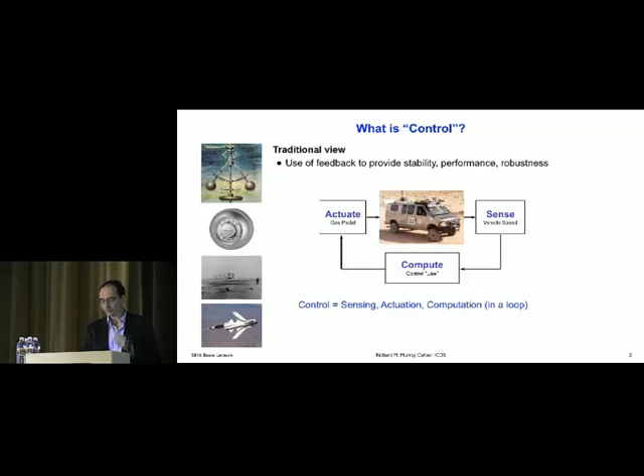But I think that this is changing some, particularly in the last 15 years or so. And the emerging view that I would espouse is that really control is a collection of tools and techniques for analyzing, designing, and implementing complex systems in the presence of uncertainty. And in particular, it's this combination of dynamics, interconnection, communications, computing, and software that make controls work.

And so this notion of dynamics, uncertainty, feed forward, and feedback, just in case you forget, if you're a Simpsons fan, you can remember Duff beer. And so Duff I think should be the official beer of the Control Systems Society. And we'll remember that it's dynamics, uncertainty, feed forward, and feedback.

Now, there are a couple of principles, I think, that go along with that, and these are really unchanged over time. I think that one principle in control systems is that feedback provides us a tool for managing uncertainty, both uncertainty in the system and uncertainty in the environment. Feedback and feed forward also provide us tools for the design of the dynamics of a system by combining sensing, actuation, and computation into the physical, chemical, biological information systems that we build.

And these two properties together give a very important corollary, which is that feedback enables subsystem modularity and interoperability, and that's what allows us to manage complexity at scale. And really, as we go forward, complexity at scale is the big challenge. And the control systems community is going to play a huge role in thinking about how do we design complexity at scale.

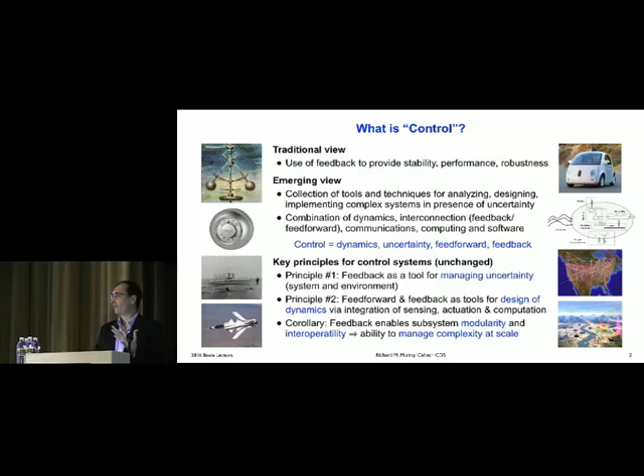And so, blogs didn't exist, Twitter didn't exist, et cetera. And so you posted stuff on the web. And so I created a web page that was the top 10 research problems in nonlinear control, right? Why I thought I was qualified in any sense to write these down, I have no idea, but I did. And this was the time of David Letterman. So those of you who are old enough remember they used to do these top 10 lists, right? You start at number 10 and count down all the way to number 1. So I ordered it that way, and so I put these down.

And in August of 1995, sort of 3 months later, I decided that writing good software had gone from number 3 to number 8. Number 2 was a new one, magnitude and rate saturation. I must have been doing something where all of a sudden I'm going, oh man, this stuff's really getting in my way, right? And then the other one was convince industry to invest. So clearly I'd had a bunch of grants turned down, right? And I was needing money. And so the number one problem in nonlinear control at the time was me getting money so that I could actually do the work in nonlinear control.

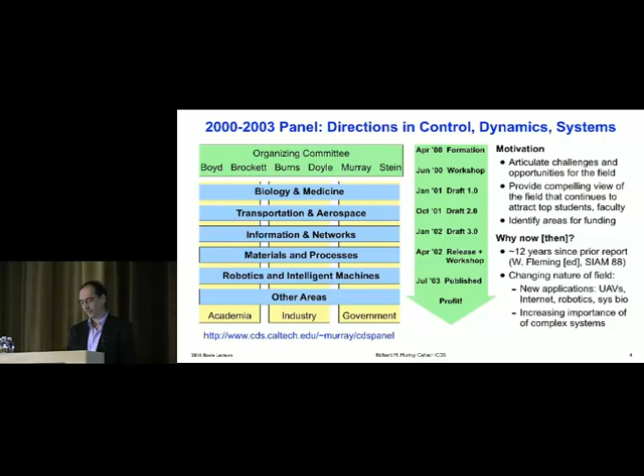And what's in the report, we organized it into an executive summary that tried in a few pages to sort of describe why this was exciting. And then a next chapter that was a little bit longer that gave an overview of the field, what is control, along the lines of what I just talked about, the increasing importance of information-based systems, a summary of the opportunities and challenges. And then in each of these application areas, we went through and talked about what is happening in this area, why is this important, talked a little bit about education and outreach, and then made some recommendations and tried to justify those recommendations. So that was what we put into the report.

And there were 5 primary recommendations at a high level that came out of this. And those 5 were, first, to increase the integration of control, computer science, communications, and networking. Second, to increase the research at higher levels of decision-making, moving towards enterprise-level systems. Third, to explore high-risk, long-range applications of control, and we listed a bunch of areas that one might consider doing that in. Fourth, to maintain support for theory and interaction with mathematics, because we felt that that was something that had been very important for the field.

And fifth, to invest in new approaches to education and outreach to non-traditional audiences, to really make control something that was used more broadly than just the controls community itself. And so those were the 5 recommendations. And if you sort of look back and say, how'd we do? I think we actually did okay on most of these.

So certainly if you look in the first area, there are now things like the technical community on network systems within IFAC, the cyber physical systems program at NSF, the Transactions on Control of Network Systems within the Control Systems Society, and many other things that line up, I think, with this first recommendation. In the areas of control at higher levels of abstraction, there's a lot of work in formal methods and other things that's now becoming more prevalent. Smart grid, smart transportation, smart infrastructure systems. And in fact, within the Control Systems Society, we now have a couple of technical committees on smart stuff.

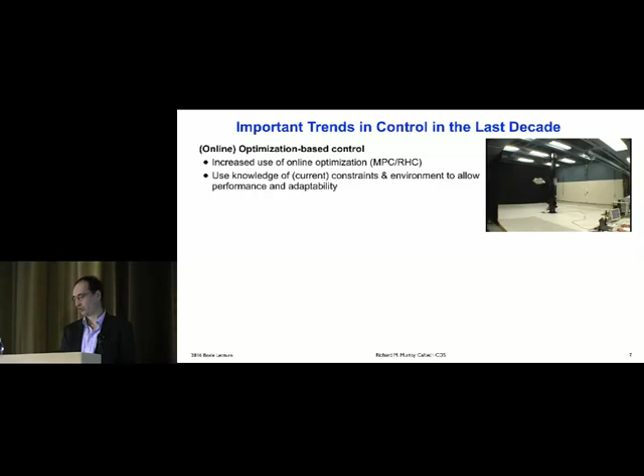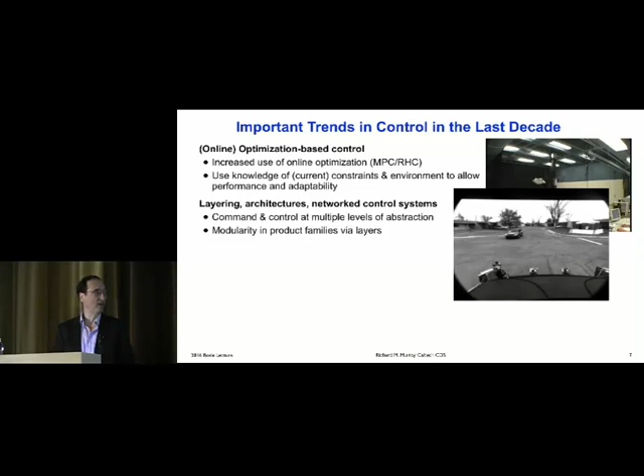Another is thinking a little bit more deeply about the role of layering architectures and networked control systems. This is a video from the DARPA Grand Challenge showing one way in which we can think about this layering, so the decision making that's happening as we're driving and we're having to think about low-level things, how do we stay centered on the road, how do we drive at the right speed, higher-level things, what road should I go on, should I turn left or right, higher-level things, when I come up to an intersection, what is the interaction with the vehicles at that intersection?

So as I come up to an intersection and I see a car stopped, I need to know that that car is stopped, I need to stop behind it, I need to wait until it goes, once it goes, I need to drive up to the intersection, right? And of course, this is the precursor for many of the things that we see in self-driving cars. This was a project that was done by a bunch of Caltech undergraduates, right, using some of the advances from our field. So I think that this is an important area as well that we've made great strides in.

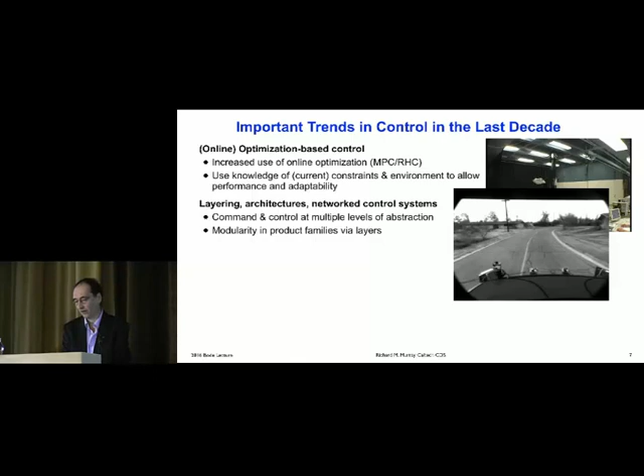As I've already mentioned, I think one of the properties of control is that it allows this modularity that allows us to connect stuff up together very quickly and get very complex systems working together. Another area where we've seen a lot, and I'll say a little bit more about it in a minute, is in the use of formal methods and combining ideas from computer science. This is a graphic of something we call the RoboFlag drill. It came from discussions with Raf D'Andrea, who was at Cornell at the time.

And this was a distributed protocol for trying to block a bunch of incoming attackers. So we were thinking about this as you're playing soccer and you've got a bunch of people coming across the field and you want to sort of guard each one of them. How do you do that in a distributed way? What information do you have to share? And it was a nice example of something where we wanted to prove that we could actually satisfy some property. So it was an example of applying these formal methods and thinking about hybrid and discrete systems and kind of the things that we're doing now in cyber-physical systems as a community.

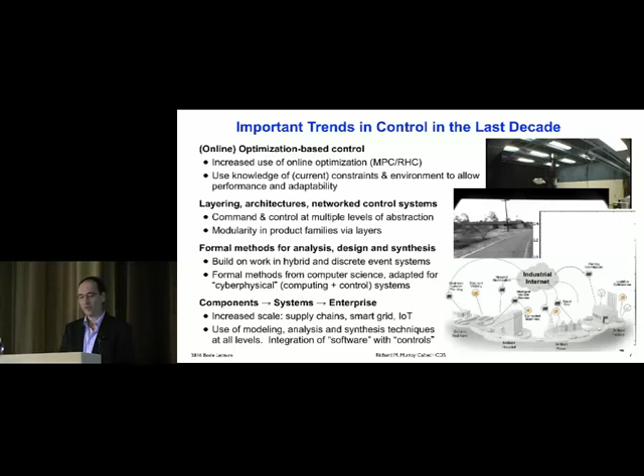And then the last area, I think, in which we started to make a lot of progress, this one's still a little bit more in its infancy, is thinking about moving to these enterprise scale systems. And in particular, as we look at things like the Internet of Things and other things, the industrial internet, this is a GE term, I think that this is an area that we see happening in the world around us and many of us are participating in.

The 5G communication network standards that people are talking about, they're talking about 50 billion devices, right? So how do we do things at the scale of some fraction of 50 billion devices, right, all managing our infrastructure systems and other things? So I think that that's something we're starting to see happening technologically, lots of future things we can do.

Okay, so as we look back, I think that we sort of see what we were looking at, some of the things we missed, but a lot's happened, and I think it's a sort of fantastic area. I want to talk a little bit about a couple of areas, and one of them is to sort of, what do things look like today in the area of networked control systems?

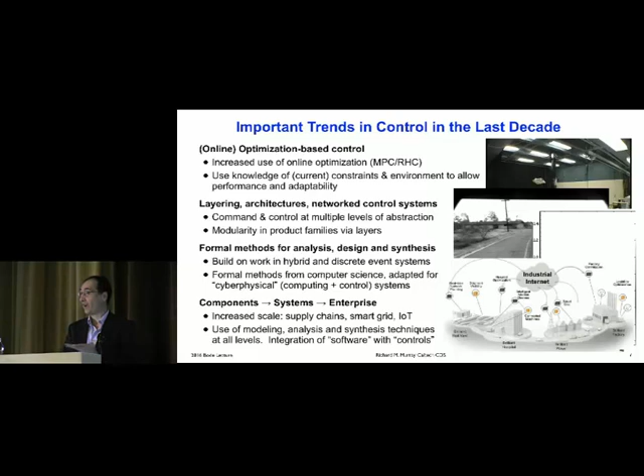And so, I think as we think about what does the design process look like today, as we design these complex systems, it's coming together quite nicely. There's still lots of work to be done, but it's coming together quite nicely. We start with some physical system that we want to control.

And of course, as control engineers, and I think increasingly we're getting involved in this very early in the system design, the first thing we do is we put together a model of the system, a model of the environment that the system is going to see. And we use that model to sort of say, will this physical system satisfy it? Have I sized the actuators right? Can I turn the steering wheel? All of those sorts of things, depending on what the system is.

And if it's not quite right, we use that model to do design iterations, right? So we'll iterate on this design and then get it to where at least we have a nominal system that can satisfy the specifications. And then we'll start to design the feedback loops that go around that, perhaps starting with the inner loops and the lower level things where we're using sensors and simple Kalman filter processing and other things and PID loops and their ilk.

to do things. And again, at this stage, we may find out that the Bode integral formula tells us that, oh, you can't actually get all that you want out of this now that we start looking at the feedback properties and the noise rejection and other things. And so we may do new design iterations. So those design iterations may change sensing and actuation, may change the computational framework, the architecture, and other things. And then we move progressively to higher levels of abstraction.

So we move to an optimization-based layer, where we'll start to do more complicated types of state estimation, maybe moving horizon estimation, particle filters, Bayesian inference types of things. On the control side, if you want, we'll do things that look more optimization-based in terms of model predictive control, receding horizon control, and those sorts of online optimizations. And again, we may do design iterations here as we do this.

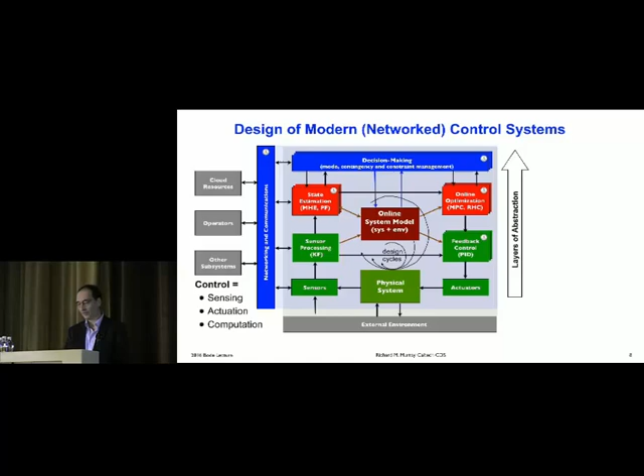But it's also very much control in the sense that I would describe of using dynamics, uncertainty, feedforward, and feedback. And so I think that it's something that we can look for how to do all of that. And this is a problem that's not just, if a computer scientist looks at that, they go, yeah, this is what we do too. They might look more at the higher levels than the lower levels, but we really have to look all across these.

So there are examples of this all over the place. Aerospace systems, self-driving cars, factory automation, process control, smart everything. And so there's certainly lots of places that we see this. And this is the type of architecture, I think, that we see, certainly in the industries that I interact with. Now, there are a lot of challenges, and these are ones, of course, that people are looking at.

One I think that's an interesting one is to think about these layers of abstraction and how do we connect the layers of abstraction. How do we define what those layers of abstraction are and what the interfaces are between them? And how do we define what the contracts are? That is, what do I assume about the lower layer at the higher level, and what do I assume about the higher level at the lower level, so that when I interconnect these two things together, across these layers of abstraction, it works. And we know from the internet and other things that those layers of abstraction and the modularity within those layers, the ability to change the underlying technology, is a huge enabler for moving forward quickly.

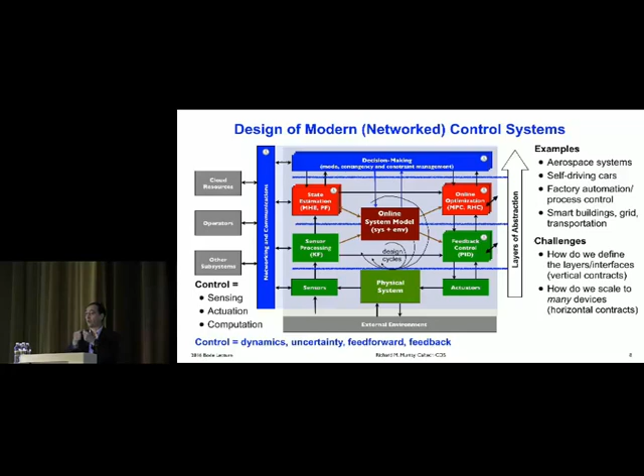I think we also have to think about how we scale these to 50 billion devices or some fraction of that. And so you can think about that as how do we scale in the horizontal direction. And so think about those as horizontal contracts. So as we look at swarms and smart grid and other things where you have a bunch of systems that are at the same layer of abstraction trying to do the same thing but are interconnected, how do we think about, again, the contracts, the horizontal contracts now that might connect that together?

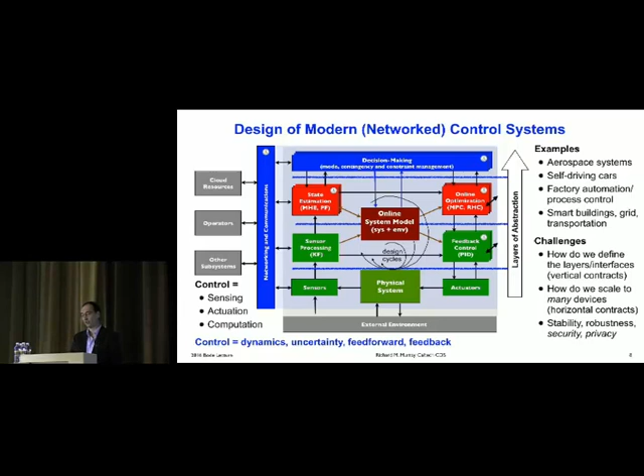And of course, all of this needs to be done thinking about stability, robustness, and importantly, security and privacy as we go through. So this is, I think, what we need to think about and what we're currently doing in terms of control systems. And so I want to talk about a couple of the pieces of this just a little bit to give more insight and say a little about where I think there's some opportunities to do even more. So one is in the area of formal methods and control.

And so Claire Tomlin asked me to give a talk at Berkeley, and she gave me the title of the talk. And so it was rapprochement between formal methods and control. I had to look up what rapprochement meant. But it was quite nice, right? You know, sort of the bringing back together, right? So reapproach of these two areas. And I think that's a very accurate thing. So the discrete event systems community has been thinking about this for a long time, but really there'd been kind of computer science going off and controls going off, right?

And now I think the two are starting to come back together, somewhat enabled by the history of the discrete event community in terms of doing that, but I think building more. You know, on the controls community, we'll think about a block diagram that looks like this, with apologies to John Doyle for drawing the arrows backwards.

And the type of specification that we might do here at a high level might be some sort of an H-infinity style specification, right, where we say that we want some output measures, errors or whatever they are, to be bounded based on the disturbances, and also allow for system uncertainty. So we're going to capture that uncertainty. And so certainly here we see dynamics and interconnection and feedback, if not feed forward explicitly, although as we know in many of these systems there'll also be a feed forward component.

Now, we can redraw that diagram just a little bit as something that might look like this. So now we've got a plant, a controller, some sort of environment, unknown environment maybe, or the delta block up there could represent system dynamics or environmental dynamics and disturbances. But I think an interesting question is to say, well, what happens when our description of all of those is in fact a discrete transition system, not differential equations or transfer functions?

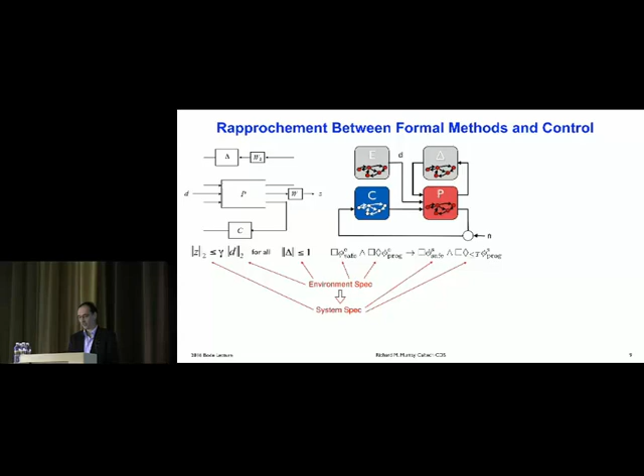And we do this in controls all the time. An LQR controller, I give you x dot equals Ax plus Bu. I give you a cost function that I want you to minimize, and I call the LQR command, right? And so we want to do the same thing now on this other side. And so this is, I think, an exciting area. It is very much, in some sense, at the heart of things like cyber-physical systems.

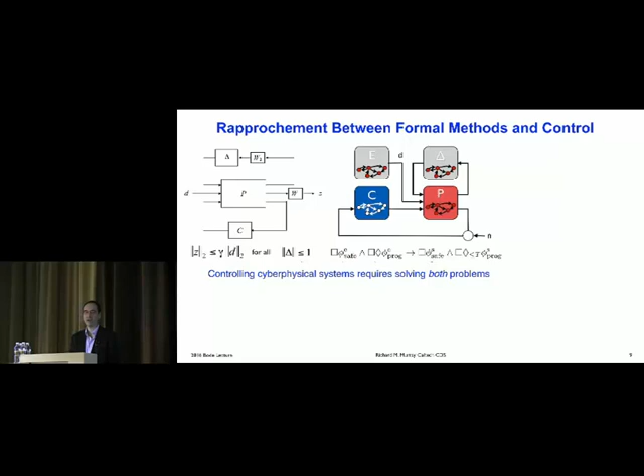And of course, you can't just solve one or the other. Well, you can, but then you will be relegated to your layer and not the layers in between. And so I think we have to figure out how to pull these things together. And there are many examples, from aircraft to self-driving cars to the industrial internet. And broadly speaking, I think that we really are starting to get more serious and more rigorous about the control of these sorts of reactive systems.

The systems are clearly too complex to be tested by trial and error. We must use more formal methods. The controls community is fantastic at using theory to help solve problems.

The systems are much too safety critical to do this, so people probably know that for software, which is what control systems are these days, running in aircraft, you have to certify that your safety critical software, so things that might lead to loss of human life, have to be shown to be reliable, to have no more than one failure in every 10 to the 9th flight hours. 10 to the 9th flight hours is 100,000 years.

How do you show that, right? You don't do it by testing, right? You have to do it by rigorous analysis combined with testing, right? And sort of think about that. The other thing I think that we're starting to see a little bit of is moving from this design then verify, here's the logic, go tell me that it does the right thing, to more of a specify then synthesize. Tell me what you want the system to do, and then I will automatically synthesize the logic.

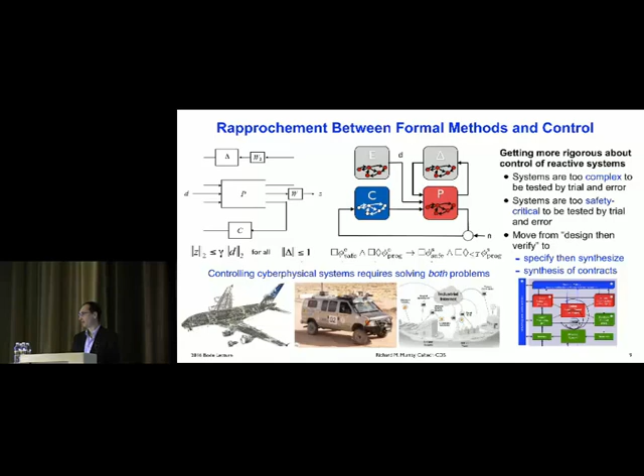And again, the controls community's been doing this for a long time, right? We're starting to see this come up a little bit more in the hybrid systems and computer science communities. I think a next step of that is to think about what are the contracts that we need to use at the different layers of abstraction, so that we can now synthesize the contracts. Here's what that optimization-based controller should do in terms of its specifications, so that when I connect it with a decision-making level and I connect it with a feedback controller, the overall system will behave in the right way. And so I think we need to think about how to do that, and some work is starting to happen.

Another thing that we're starting to see a little bit more is combining both data-driven and formal methods types of systems together with controls and thinking about human-like interactions. And again, self-driving cars is really pushing this forward as we have to think about how do we make sure that humans can operate in environments that machines are operating.

And finally, I'll just point out again, for about the 5th time, that we need to be incorporating security and privacy guarantees as we do this. We don't want to redo what we've done before in SCADA systems and other things. It's not think about that, it'll get handled later. No, it won't. We got to think about it now. And again, these ideas of formal methods and control and other things, there's great connections between observability and reachability and things like privacy and security. And so I think that the tools can come together there.

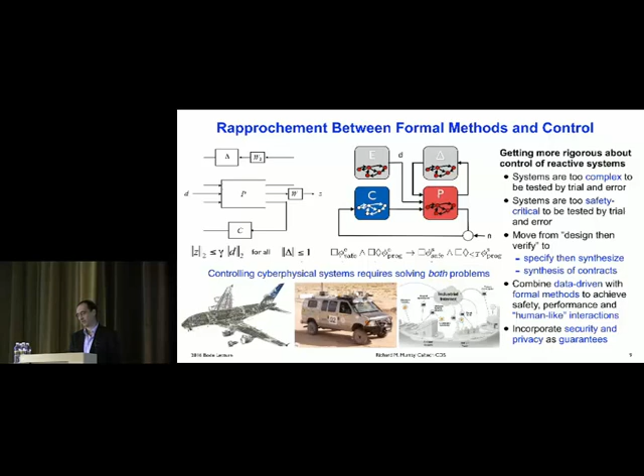Okay, so this is, I think, an area that when I look out now, I see lots of promise and lots of people working on it across the community. We've seen many things here at CDC about this. So where do we go from here? This is sort of what's happening and what's currently here. So I think there are some opportunities for the future, and I've divided them into 2 pieces. One that I'll call traditional, and I don't mean it in a derogatory sense, but thinking about the things that we know that we do well. And so certainly one is what I've just been talking about. I think we need to continue our focus on rigorous design of complex systems.

One of the things that in the last couple of years I finally understood, people have been trying to tell me for a long time, I used to say, oh, cyber-physical, how clever, they renamed hybrid systems, and they got more money for it. That's pretty cool, that's a good idea, right? Because you can't fund hybrid forever. So let's just call it cyber-physical. But in fact, that's not right. Cyber-physical systems are different.

Because they're really bringing a computer science perspective to the control of physical systems. So the cyber there matters. It's not just continuous and discrete. It's thinking about the things that computer scientists think about, verification and model checking and scale and all of the other things that computer science has done so well. And really, that to me was like, oh man, I finally get it. I'm working in this area, and it finally occurs to me why cyber-physical really is something that's kind of new and different.

I think the other thing that we have to think about is large-scale systems. The Internet of Things is coming. It's an opportunity. It's going to have huge numbers of devices on it, and we're going to start connecting those together.

The 5G networks, right? People should remember the 5th G stands for control, right? Because really it's putting in the time criticality and other things. That's one of the goals of the 5G networks, is to get the time criticality down to where you can use it for feedback control systems.

So guess what? We're going to get to use it for feedback control systems, but we're going to have subsystems that consist of thousands and millions of devices that are being connected together. And so how do we think about that, I think, is a good one. And again, data, security, privacy, humans, the things we missed the first time around, let's not miss them this time as we go through.

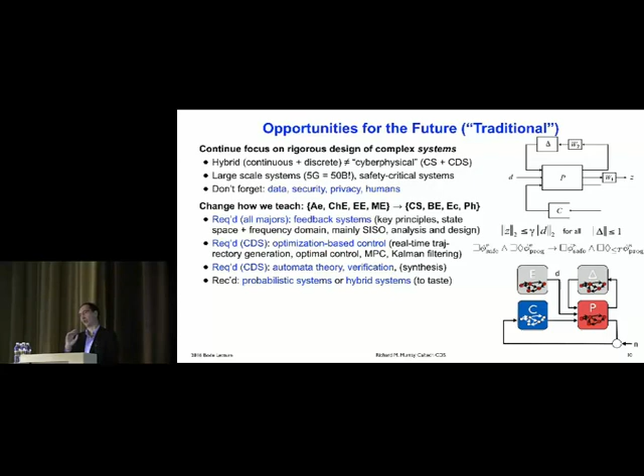I would say certainly the basics, something in optimization-based control, something in kind of computer science and modern computer science methods, and then some additional things for a little bit of breadth. And the 2 I picked out here were hybrid systems and probabilistic systems. So that's one. Another thing I think we ought to do going forward is to continue to get out of the box.

And down in the right-hand corner, he sort of drew this box. And here's the space of linear systems. And he drew a tiny little box. He says, now look at where the control community is. They're all crammed in this tiny little box, right? Good for you. You're in the next little box, right? Because I was doing nonlinear control. Get out of the box, and start thinking about what's going on in a bigger sense. And so I think that that's important.

So again, I would say we should think about control as the field that combines dynamics, uncertainty, feed forward, and feedback, right? Have a couple of beers, think about what that means. I think we need to go from just thinking about things like ODEs, PIDs, LQG, and MPC to thinking about computer science, machine learning, artificial intelligence, synthetic biology, economics, physics, as what we think about as a field.

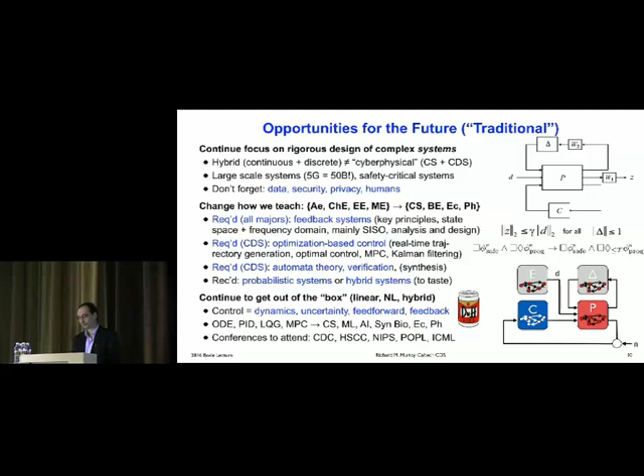And I think in addition to coming to conferences like CDC and HSCC, we should go to things like NIPS and POPL and ICML. And if you don't know what those are, go look them up. Because they're important conferences for us to be represented in, and for those people to be represented here. All right, so in the kind of mainstream areas, I think this is one.

I want to also talk a little bit about what I'll call non-traditional. And here I want to build on this recommendation from the panel report back in 2003 about exploring high-risk, long-range applications of control. And I think in this area we have to recognize that this may be different than the more traditional ones. In particular, we may actually require new types of sensing, actuation, and computation, plus new architectures that are tuned to that. And it may not be the same as what we do in other areas.

And I'll use as my example here an area that many of you know I've been interested in for a while, synthetic biology. And so here's what I'd like to do before I retire. I'd like to build the system you see on the right. This is a nanoscale machine. It has a bunch of subsystems in it. It has a power subsystem called metabolism. It has a sensing subsystem, an actuation subsystem, a communication subsystem, a computation subsystem. And all of these subsystems are regulated and co-regulated.

This is, for me, an autonomous vehicle. But this autonomous vehicle is a couple of microns long. And I don't know how to build that out of metal or other materials, silicon, et cetera. But biology knows how to build that out of molecules. So if we think about that as a design problem, can we design a 1 to 2 micron long robot that can find a toxin and neutralize it? Or assemble a bunch of chemicals into food? We know this is possible, no question. Can we as engineers design such systems? And I don't care about the systems being living. In fact, I don't want them to be living.

I want to design, I want to put it together. If I turn the power off, I want it to stop working. Right? But I want to do it at that scale. And so I think if we think about that problem, that one may require us thinking about, okay, fine. What does the sensing system actually look like? What's the actuation system? How are you going to do computation?

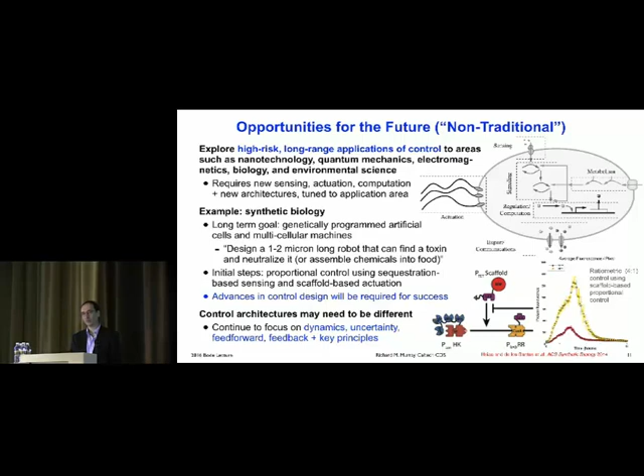And so now you've got a 1,000,000 by 1,000,000 interconnection matrix that you get to design. What structure should you put on it? If this is the brain, it's 10 to the 11th neurons. So if you want to design something that looks like a neural computation, how do you decompose that problem? At a very high level, maybe it looks like this, but what goes underneath looks very different. So I think that that's kind of a different thing.

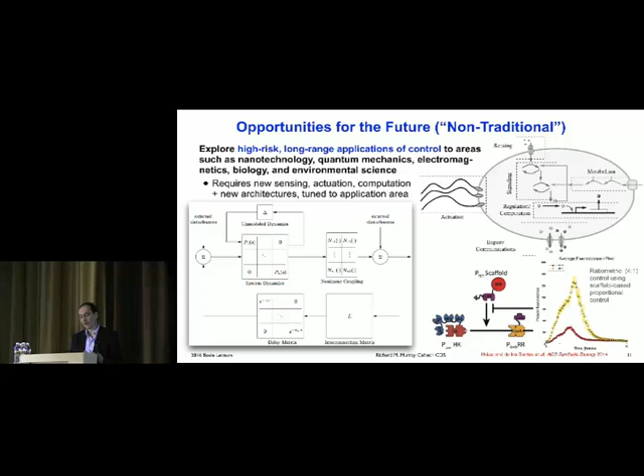Okay, so I told you a little bit about what we've done. I sort of want to wrap up. So I started and told you a little bit about this experience, which for me was a very important one, of thinking about what the future might look like. I think we got some things right. I think we missed some things. I think by and large, the big picture there was pretty close, and it led to lots of advances.

I've been very fortunate in my own career and in the things I've gotten to work on, to work across a number of different areas and to think about how some of the ideas that we articulated back in 2003 might play out, whether that's in the sorts of architectures that have layering and formal methods and other things that we might use for modern systems ranging from flight control to self-driving robots to different types of Internet of Things architectures.

That's one area, but also in these more novel areas, which in my case is synthetic biology, but for others of you is geoengineering, what are the actuators there, or quantum mechanics, right? Sort of what are the sensing mechanisms there and how does that differ, right? I think all of these are sort of interesting areas.

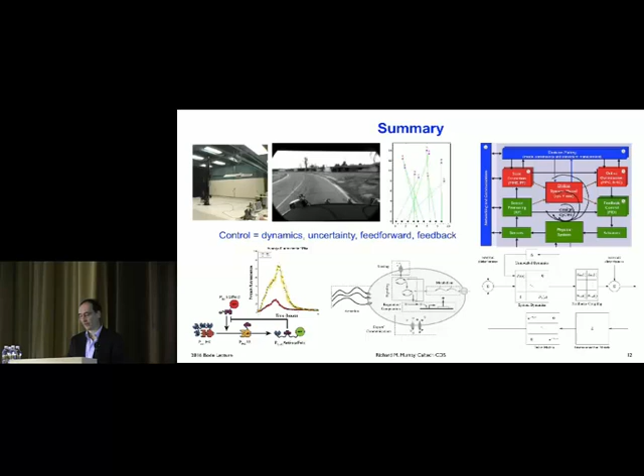So I'd like to end by just thanking a couple of people. So one is the various groups that have supported the research. So this includes AFOSR, and in particular, Mark Jacobs and Siva Banda have been extremely supportive in my interactions with the Air Force. The National Science Foundation, DARPA was an early funder of this work, the Office of Naval Research and the Army as well.

We also received a lot of interaction and support from companies. So Get Industry to Support finally worked. It took about 20 years from when I first wrote it down, but they finally started helping out. And in particular, I'd like to acknowledge United Technologies, Northrop Grumman, IBM, and most recently Denso.

And it turned out, and this is, I think, important for the field to think about, for me moving into synthetic biology, there were two enablers. One was the Army, interestingly enough, through the Institute for Collaborative Biotechnology that Frank Doyle actually ran for a while. And the other was the Moore Foundation, right? And the Moore Foundation gave some money to Caltech that allowed us to do that.

And I think we have to think about as a field, how do we get money for doing blue sky stuff, right? That I can't tell you why this is beneficial to society quite yet, but I think it probably is interesting, and how do we do more of that? And so I think that's something we have to think about.

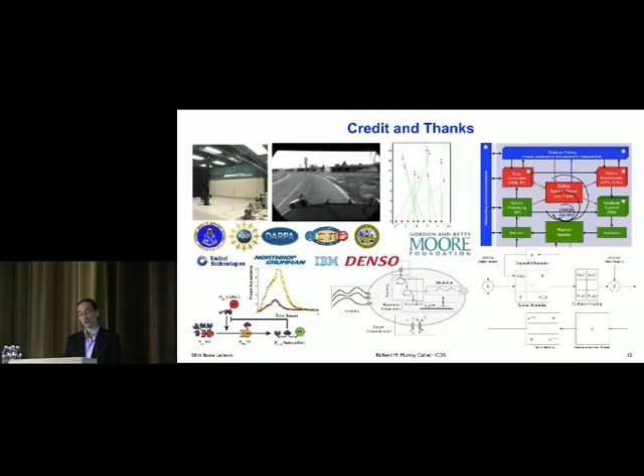Of course, all of this is something that also was helped by a tremendous number of people. And so I'd like to thank just a few of them. And so one is certainly the group that I worked with on the future directions of control, and Karl Åström, Siva Banda, Stephen Boyd, Roger Brockett, John Burns, John Doyle, Mark Jacobs, and Gunter Stein.

But Caltech is a fantastic environment for doing that, and I've had many pleasant interactions with people across the spectrum in terms of their field and other areas. The Jet Propulsion Lab, which is nearby Caltech, academics that I've had joint students, postdocs, papers, and other things with, and people in industry. And so a large group of people that have been really responsible for helping shape what we do, as well as the people back from my graduate school days, and Shankar Sastry, my advisor in particular, but also some of the graduate students that were in Shankar's group and nearby at the time.

And I've also had the pleasure of having a lot of undergraduates. So Caltech has a program called the Summer Undergraduate Research Fellowship Program, SURF. I've had about 150 SURF students over the years. This is a fantastic way to explore new areas, right? Because they do about a 10-week project, and then they go away, right? And so at 10 weeks, you know, you haven't wasted much of their life with some harebrained idea that didn't work out, right? And so I very much encourage everybody to do that. And I've had a huge number of visitors that have come over the years as well.